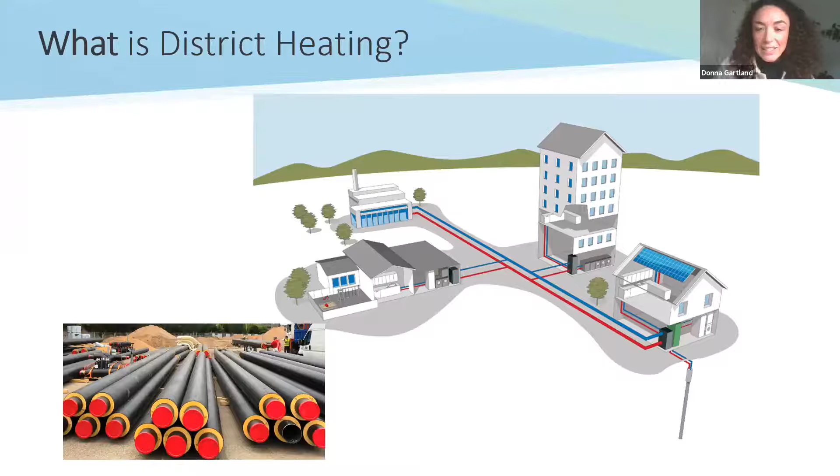This technology is quite new to Ireland, but very well known across Europe. I'm sure Mario, who's also on the call today, will know a bit about district heating — there's a lot of district heating schemes in Italy. But it just hasn't really taken a foothold in the Irish market or the UK market either, so we were kind of the last to the district heating scene.

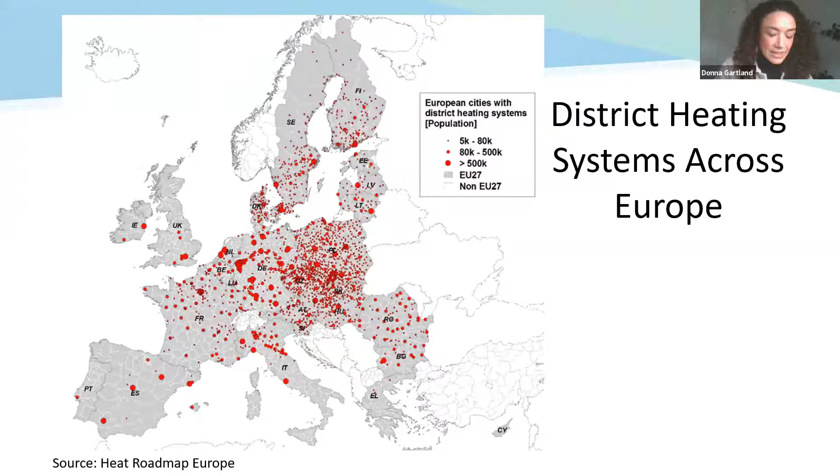It is widely used across Europe, not just in cold countries. There are schemes all the way from the very south of Europe up to the tips of Finland and Sweden. These schemes have been around since the first district heating scheme was developed in Denmark back in 1910 — so it's a well-established and well-proven technology.

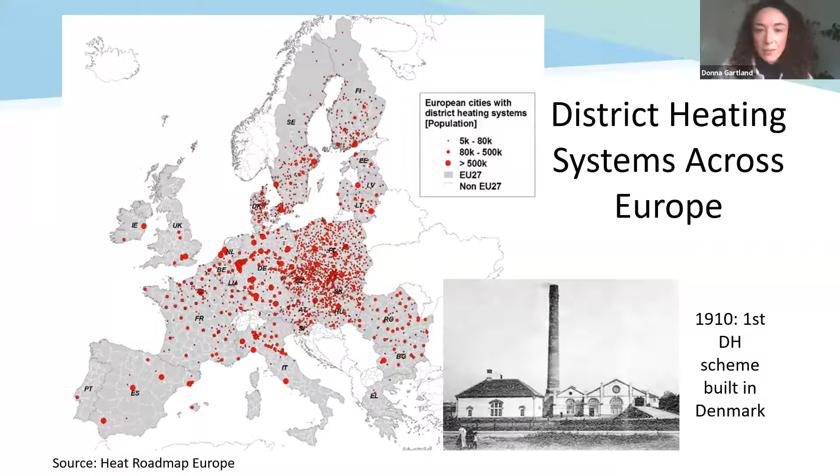So how does it relate to the circular economy? When we talk about district heating systems, we often talk about utilizing waste or excess heat. Taking the direct definition from the EU Renewable Energy Directive, this is heat or cold generated as a byproduct in the industry or tertiary sector, which would otherwise be dissipated unused — thrown away into the air or water — without access to a district heating network.

Obviously building a pipeline down to your local power station just to connect your own household is not going to be economically viable. So you need a network with multiple buildings connected to the pipeline to make use of this, giving you the economies of scale to make use of this waste heat technology.

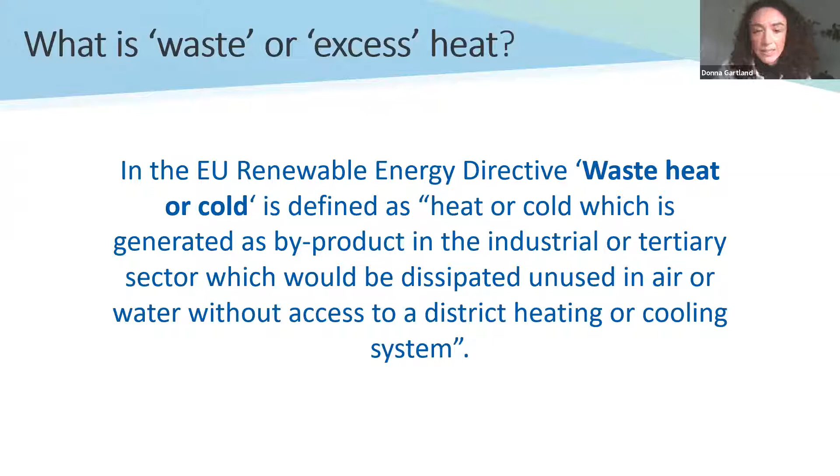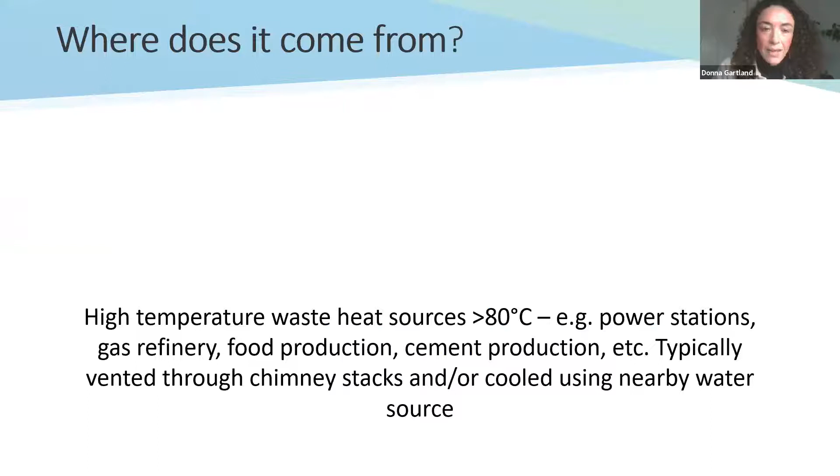So where does this waste heat come from? We have different types of waste heat. There are high temperature waste heat sources, typically above 80 degrees Celsius — directly usable hot water that's currently going to waste from things like cement factories, power plants, waste energy plants, gas refinery plants, and large food production or distilleries.

All of this is quite visible because it's high temperature — on cold days you can see the plumes of steam coming from chimneys, for example. But you also don't see what's cooled through local water sources, as it's also dissipated to local rivers and nearby water sources.

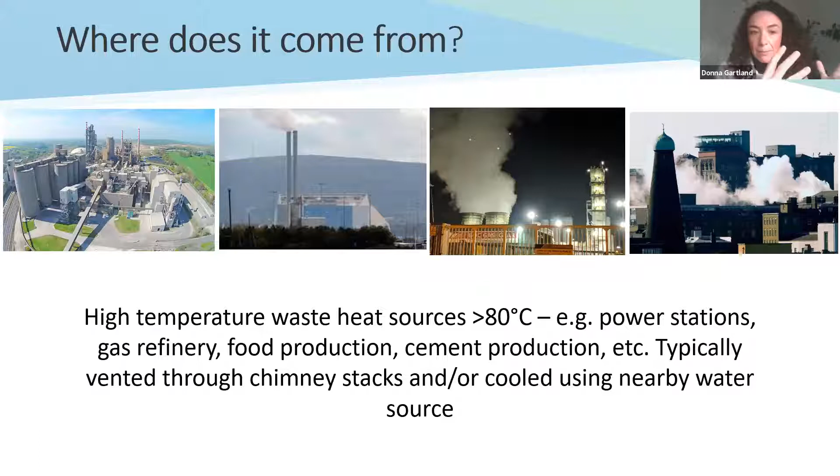We also have low temperature waste heat sources which are also usable, in the range from 20 to 40 degrees. Even though your gas boiler might deliver 70 or 80 degrees to your heating system, the actual space heat you want in your house is usually around maximum 25 degrees. So for new builds and retrofit buildings, this is very directly usable for space heating, but needs to be boosted up for hot water use.

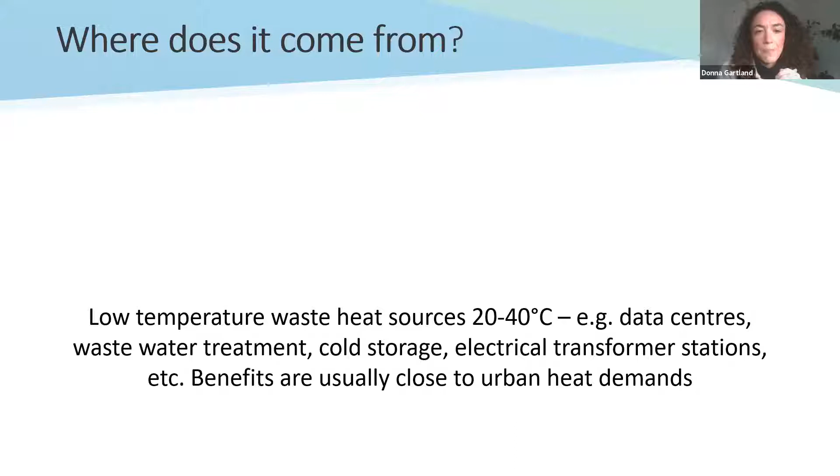The kind of sources for this are things like data centers, which have a large amount of waste heat, wastewater treatment plants, electrical transformer stations, and cold storage. These are just some examples. There's a good European project called Reuse Heat, so if you go into reuseheat.eu, it gives you a larger list of different sources of heat available at different temperatures.

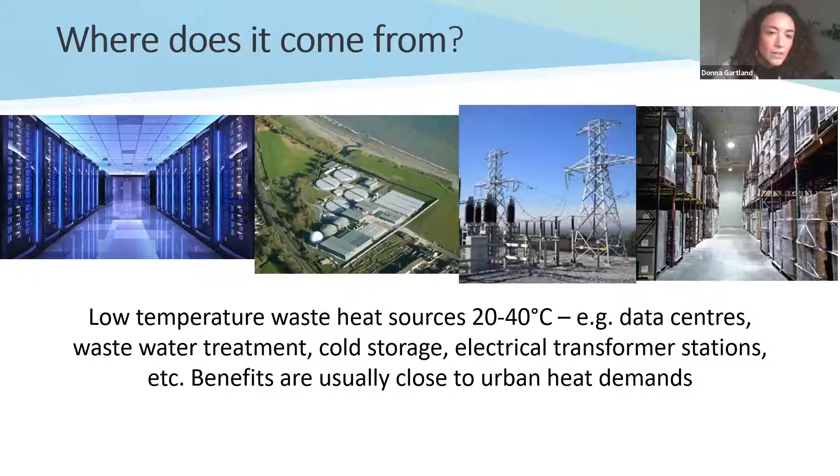One of the advantages of lower temperature sources is they tend to be quite close to urban heat demands. The sources have to be within range, close by to the demands of the buildings you're going to be supplying. In terms of circular economy, this is a big issue at the moment. We're not using this - the only people making use of it are the birds and the fish, especially during a cold spell like we're having now, those guys are enjoying it a lot. But if we can make use of it, we can offset our own fossil fuel use, our gas and oil use for heating.

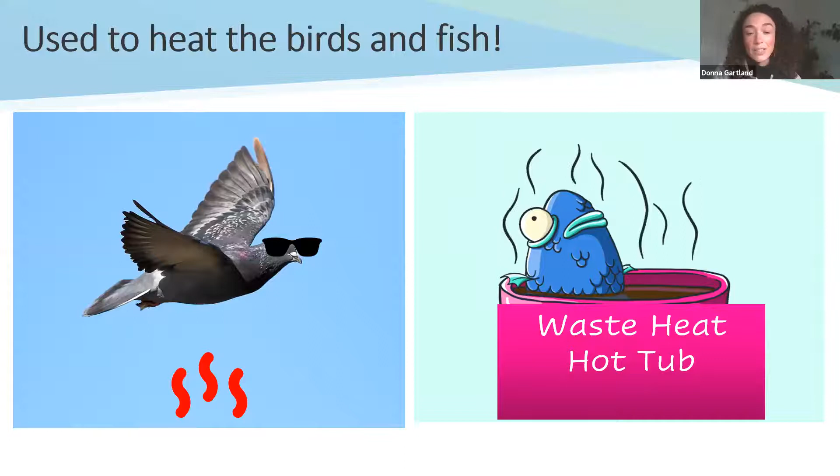If you want to understand where these sources are in Ireland, there are some good resources available. The Irish Heat Atlas, available at districtenergy.ie, shows you the conventional excess heat activities - high temperature, large scale sources such as industrial excess heat, waste energy plants, and power plants. You can see where those sources of high grade waste heat overlap with areas with high density heat demands, which would be highly suitable for district heating rollout. Where those areas overlap are the high suitability areas. Cork, for example, has a couple of large scale sources of waste heat from power plants, and large heat demands within the city region as well.

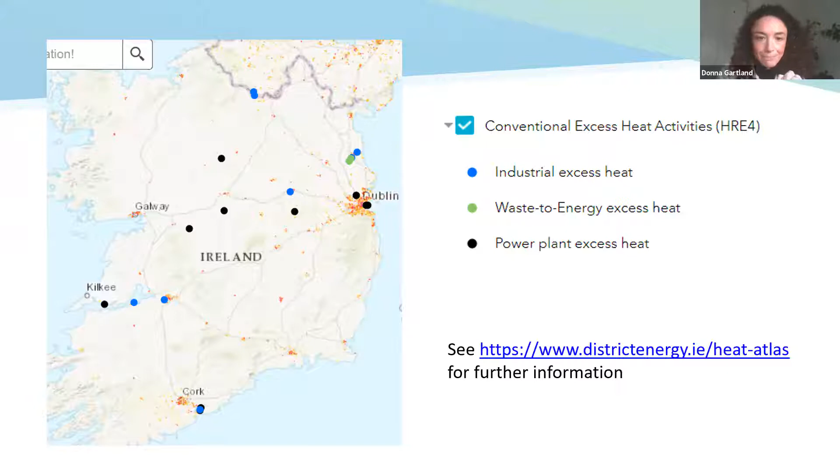Being the Dublin Energy Agency, we've done further work in the Dublin area to look at the wider waste heat sources available - not just large scale power stations, but also the other sources I mentioned, such as data centers and wastewater treatment plants. On that map, the bigger the symbol, the larger the waste heat available from that source. The big red dots are the data centers, which represent a big source of waste heat, particularly around the Dublin area where a lot of them are located. Power stations and wastewater treatment plants also have very large amounts of waste heat available.

We've estimated that there's enough waste heat available in the Dublin region to heat about 1.6 million homes. This is something that's being thrown away. We talk about circular economy, but just because we can't see it, it's not as evident as plastic bottles or anything else that's being thrown away. This is being thrown away to the air and to water, and it's been largely ignored in our energy policy up to now.

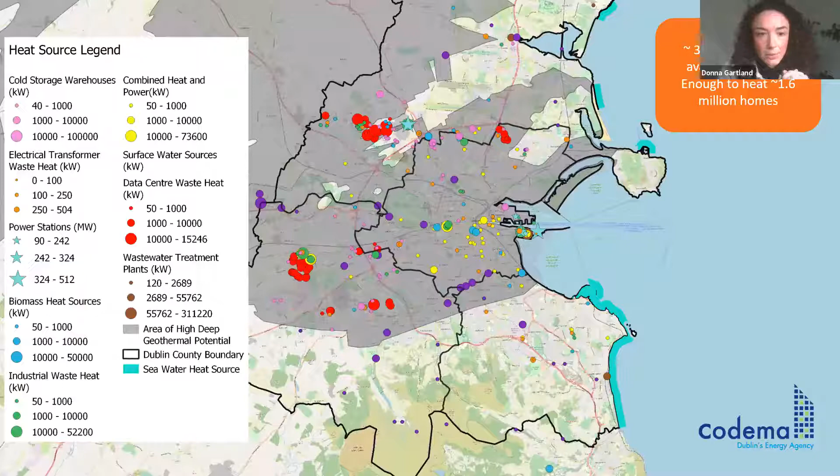Why we're looking at using district heating particularly is because it can be used to recycle this waste heat through the pipelines. Importantly, what district heating offers is thermal storage - basically big giant hot water tanks. Imagine the one in your hot press at home, but multiplied by a few thousand.

So a large hot water tank is the cheapest form of energy storage available. It's a steel tank with a bit of insulation around it. This can then be used to utilize the waste heat at different times. So if you don't have demand at the time when, say, the local cement factory or the local power plant is producing the waste heat, it's stored in these hot water tanks and used during the week or over the next few weeks to supply that demand. So you're able to utilize more of the waste heat that's available.

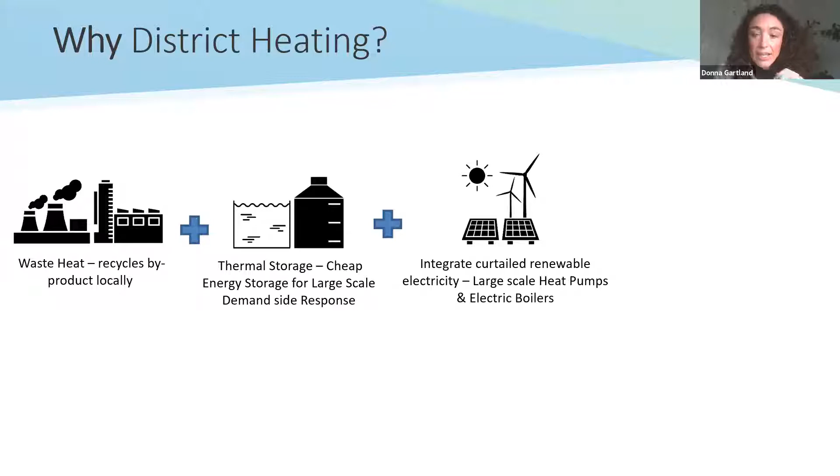Also importantly, thermal storage allows integration of curtailed renewable electricity. Curtailed renewable electricity is when renewable generators, such as large wind or solar generators, are asked to dispatch down, asked to turn off because there's too much renewable energy on the grid. This is essentially another form of waste energy - wind that's blowing, the sun is shining, and we can't utilize that electricity. So again, we can utilize it in the heating sector through large-scale district heating systems, utilizing large-scale heat pumps and electric boilers. And obviously all of this offsets the CO2 and the fossil fuels used in our heating sector.

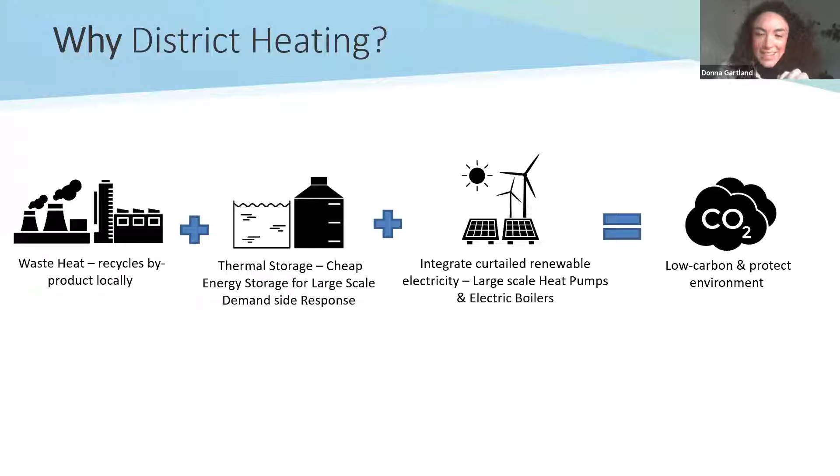So in practice, how are we doing this? As Val mentioned, we're working on 2 schemes. I'm just going to highlight one of them today, which is the Tallaght district heating system. We're also working on another one which utilizes waste heat from the waste energy plant in Poolbeg with Dublin City Council. But the Tallaght scheme is quite innovative in that it's using the kind of lower temperature waste heat source from a local data center.

So a data center was being extended in the Tallaght area, and we saw this as a great opportunity. We've been planning to do something around district heating in Tallaght, and we got European support through an Interreg Northwest Europe programme, and we were able to progress that project with South Dublin County Council driving that project. So you can see here a little image of the nice energy centre that is being built in the next 6 months. And the pipes are just being delivered now, thanks to a few delays from Brexit, but they are now on site.

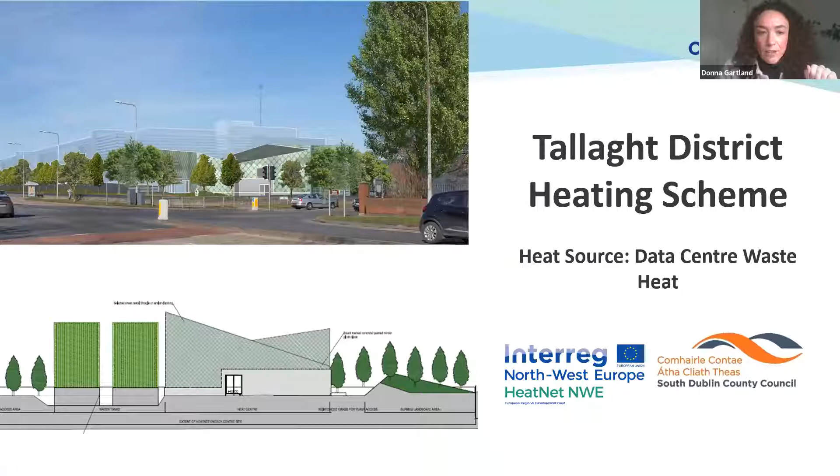So this scheme is currently being rolled out, and the waste heat source, the data center, gives us waste heat input of about 25 degrees Celsius. We're connecting to existing buildings in the first phase, so we have to boost that temperature up to supply those buildings, which have high temperature requirements. We're using 3 two-stage heat pumps, which bring that 25 degrees Celsius up to between 70 and 85 degrees, depending on the time of year. And having that 25 degrees in makes it a much more efficient process than using, say, ambient air temperature in a heat pump.

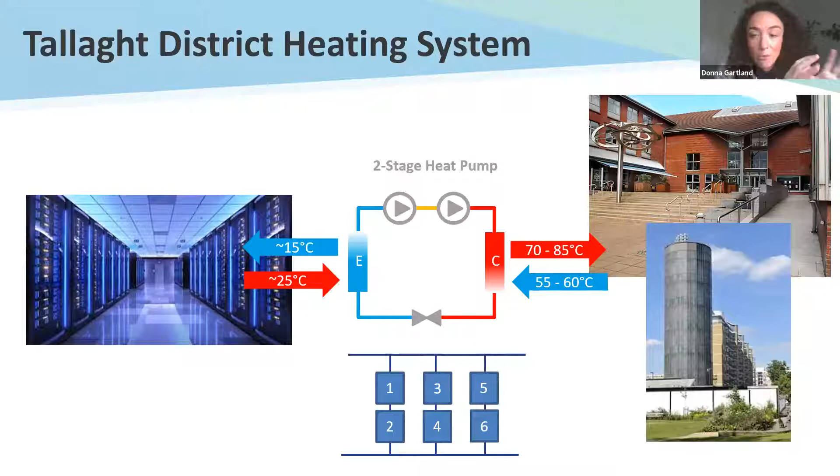So that's a practical example of how we're utilizing waste heat in Ireland, and hopefully this will be the first of many more pipelines and projects to come forward, and hopefully some starting in Cork in the near future. Thank you.

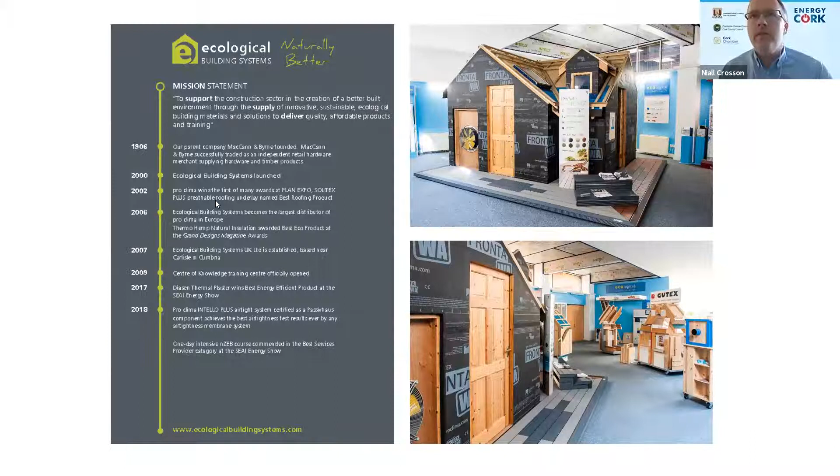We've partnered with companies that manufacture natural insulations from wood fibre, hemp, cellulose, and other innovative air tightness systems. Our core focus is really on health, well-being, and supplying the market with more sustainable materials. But a core part of what we do is training and education, both for specifiers and for builders, in our training centre in the Midlands in Ireland and in the UK.

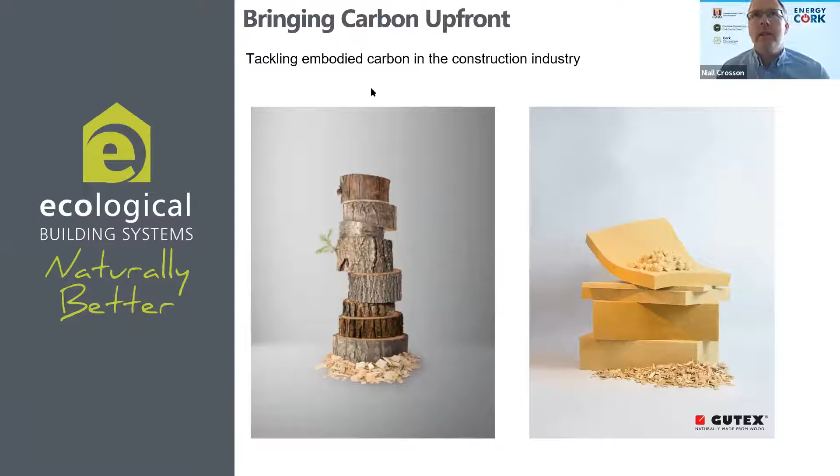So my presentation today will be a whistle-stop presentation. I'll be speaking in relation to the Irish Green Building Council and some of the work we've been doing, and also about the industry as a whole in terms of bringing carbon upfront in the construction industry and trying to tackle embodied carbon.

So if we look at embodied carbon in the construction industry, a guy called Anthony Pak, who I have a lot of respect for and I've read a lot of his papers, calls it the blind spot of the construction industry, and for very good reason.

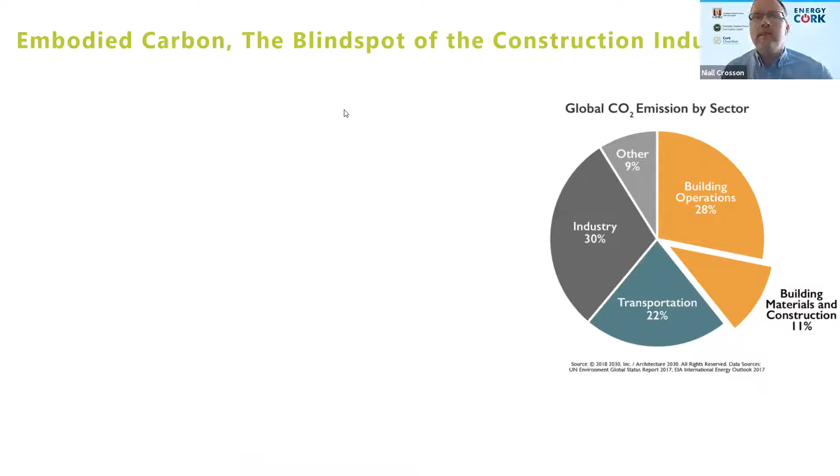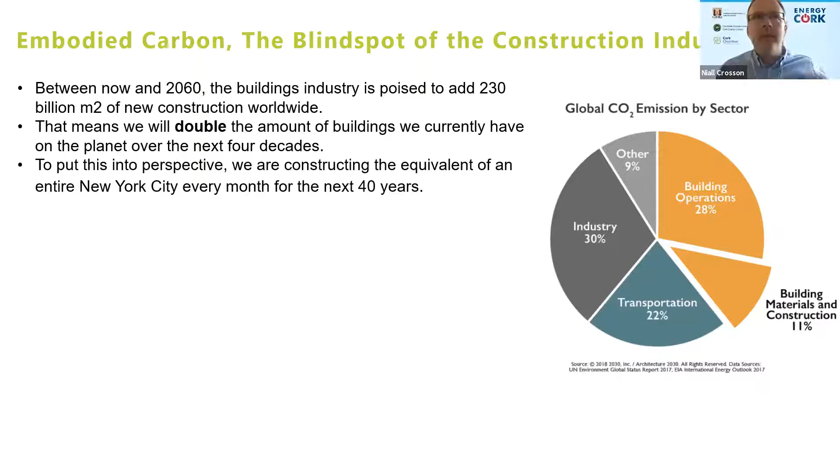According to a paper from Architecture 2030, between now and 2060, the building industry is poised to add 230 billion square meters of new construction worldwide. This means we will double the amount of buildings we currently have on the planet in the next 40 years, a huge increase. To put this in perspective, we're going to be building another New York City every month for the next 40 years.

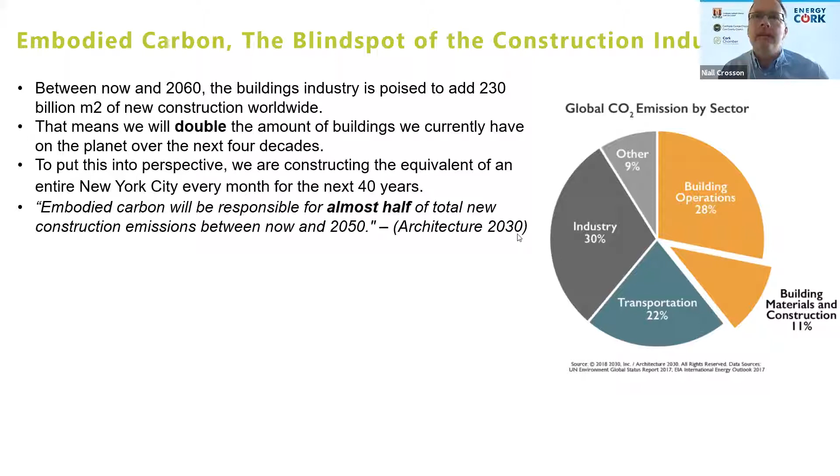Embodied carbon will be responsible for almost half of the total new construction emissions between now and 2050. So if we're missing the embodied carbon, we're missing the point. It's crucial not only to look at operational energy. Operational energy is important, but we also have to look at the materials we use to build within the construction industry to really tackle climate change and reduce our environmental footprint on buildings.

Just to put that visually, this is an illustration from the Wood for Good campaign, which shows an actual building in London called Bridport House. This is a block of apartments built using a construction method called CLT, or cross-laminated timber, instead of concrete. Whereas concrete would emit at least a kilo of carbon for every kilo produced, this CLT absorbs and sequesters a kilo of carbon for every kilo used.

As a result, by using a more sustainable building material, this building sequestered over 1 million kilos of carbon within the building fabric. This is even before it's heated. So this just illustrates the impact our material selection can have on when we build.

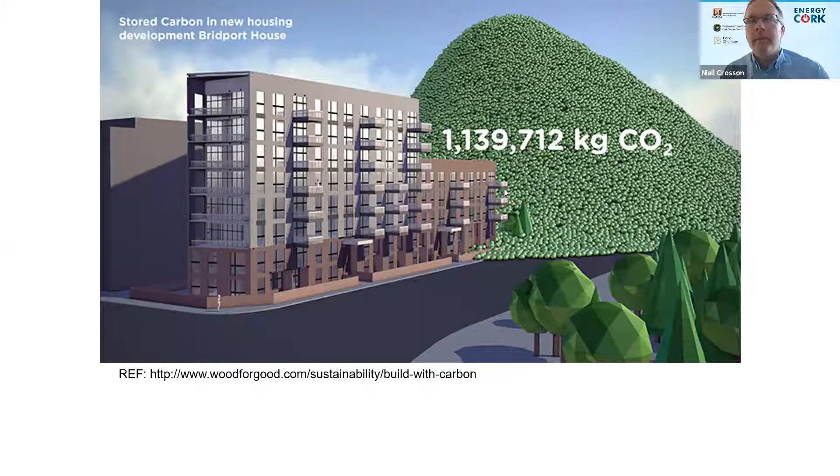In terms of insulation materials, now more than ever, there are many more sustainable alternatives available which have a circular life cycle, such as hemp, for example. This particular product is called thermo hemp. It's grown in Germany and it's manufactured. Basically, the raw plant is separated in a decortication plant where the seed, the bast fiber, and the shives are separated, and go off to various industries in the form of insulation.

The bast fiber is taken, manufactured and used, insulated in homes, and for every cubic meter of hemp manufactured, it sequesters 13 kilos of carbon. So by using this material, you're locking the carbon into the actual fabric rather than emitting carbon. There's a carbon negative footprint, and then it can be recycled at the end of life.

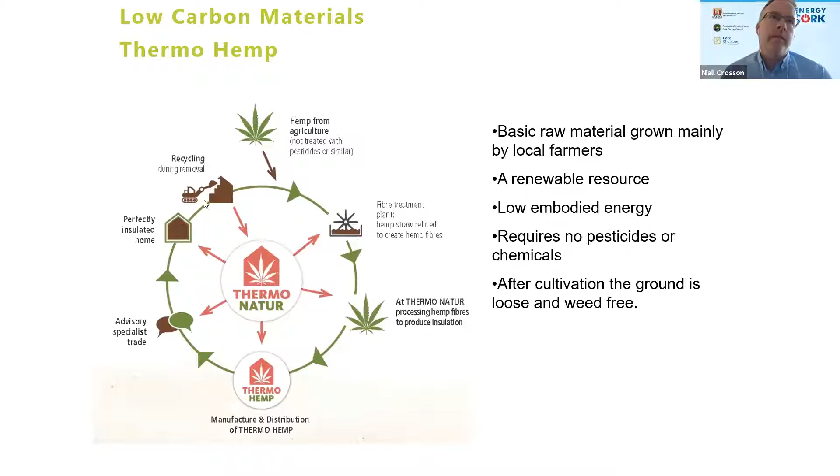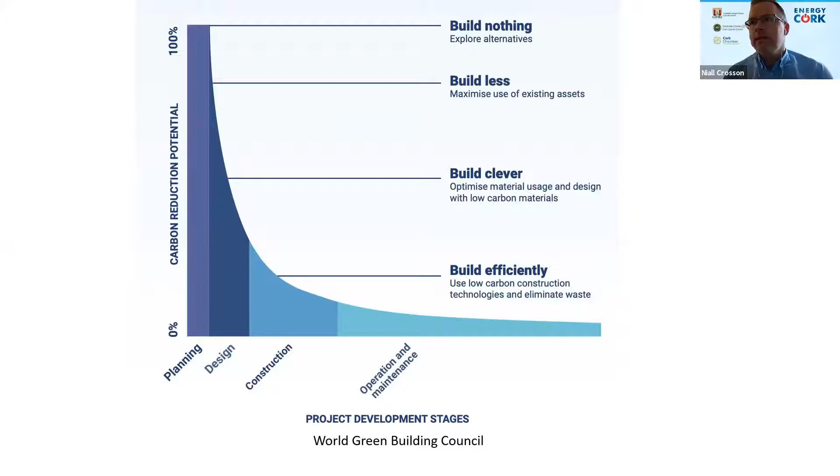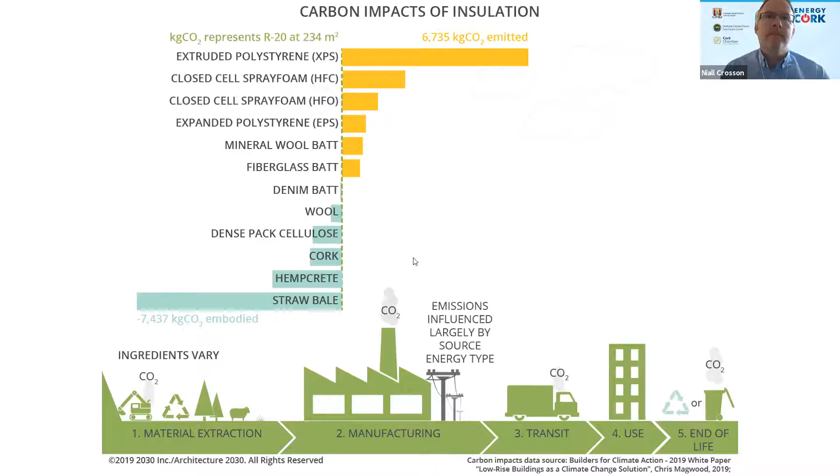This brings me to environmental product declarations. Environmental product declarations are becoming more and more crucial in our material selection, especially for designers and specifiers, and for manufacturers—they are more and more becoming the norm.

For manufacturers, they can gain a competitive advantage by publishing an EPD because it produces documented and certified proof of the environmental impact of their product. So it tries to take out the greenwash and allows specifiers to analyze materials and compare like for like. It also assists companies to adhere to their company mission and provide more sustainable alternatives.

Specifiers can also earn points by utilizing EPDs in buildings using rating systems such as BREEAM, LEED, or the Home Performance Index in Ireland. Implementing an EPD in the marketing strategy also helps communicate a product's environmental benefits, and the EPD can help improve supply chain development within manufacturing processes. For manufacturers that get an EPD, it supports the ISO 14001 standard and allows the company to improve their manufacturing process. It's also very effective for benchmarking and increasing visibility.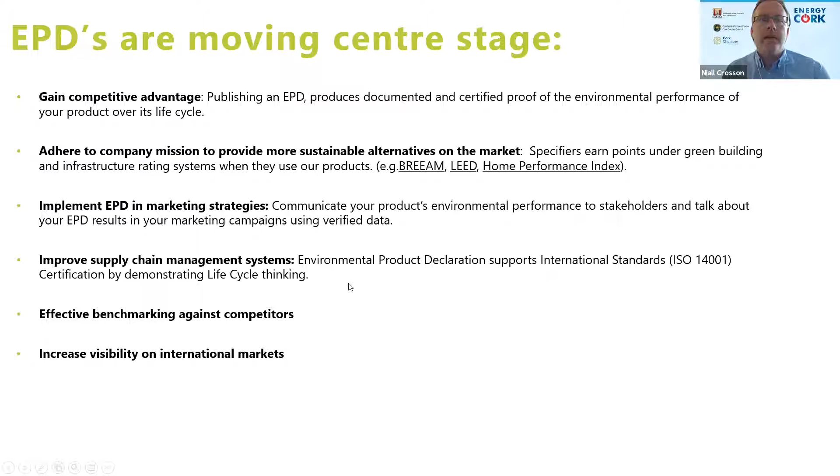On this website, epdireland.org, it's a central database developed by the Irish Green Building Council where you can log on and download EPDs from a whole array of many, many manufacturers. So there's a central portal that specifiers can now review and then make selective and informed decisions about what materials they use in buildings and specification.

In the built environment in Ireland, it influences over 50% of Ireland's carbon emissions. So really looking at the raw materials we're using in buildings is the next step to really realizing low carbon buildings.

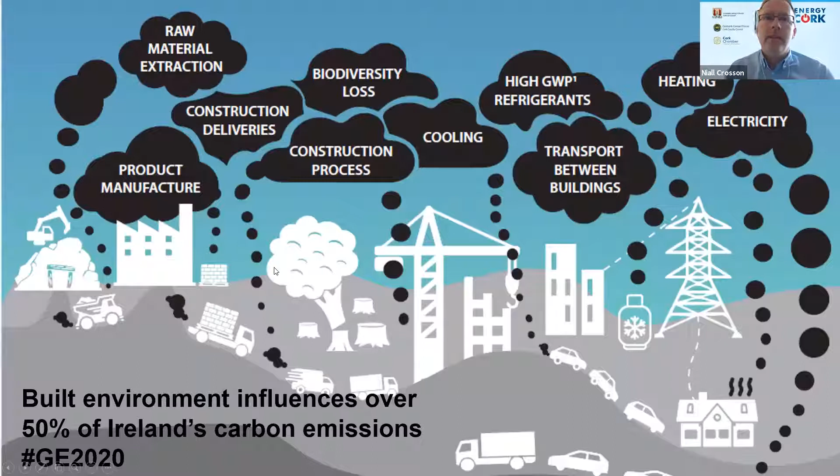This is the report from the World Green Building Council—I'd highly recommend 'Bringing Embodied Carbon Upfront.' I just took some main points from it in terms of their definition. Net zero carbon embodied carbon should be pursued as part of a whole life cycle approach to carbon reduction that includes net zero operational carbon. So a net zero embodied carbon building, new or renovated, or infrastructure asset, is highly resource efficient with upfront emissions minimized to the greatest extent possible. And I think that's absolutely key, and it's something we need to realize more and more as we renovate and as we build going forward.

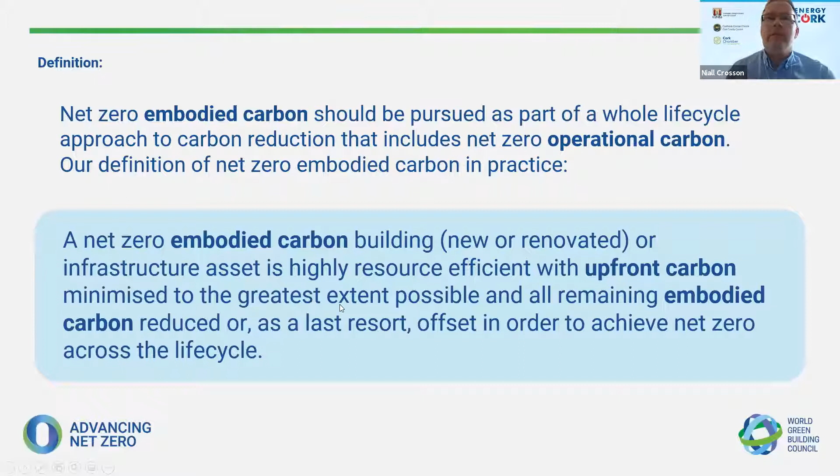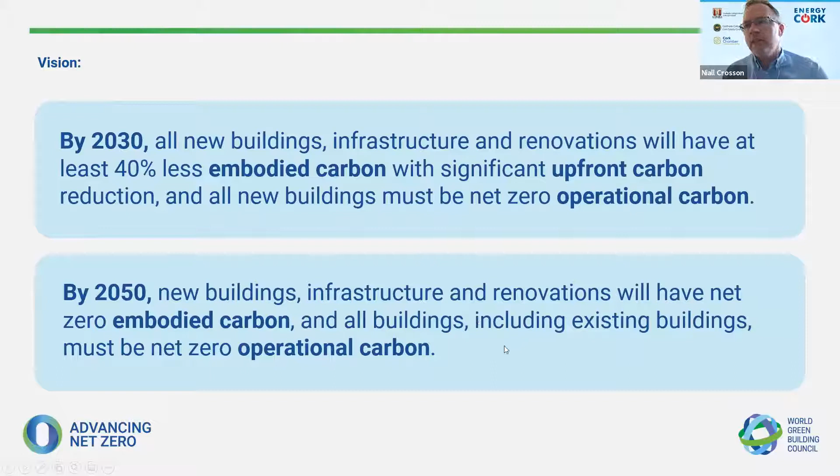And by 2030, all new buildings in terms of their vision and infrastructure and renovations will have to be at least 40% less embodied carbon with significant upfront reduction. By 2050, new buildings, infrastructure and renovations will have net zero embodied carbon. This shows it's very ambitious, and with the new government announcement this week, this should form a central part if we are going to seriously impact our carbon emissions in buildings and the built environment.

Just to give a figure relative to Ireland in terms of embodied carbon in buildings and some rating tools - this is documented information I received from the Irish Green Building Council using one-click life cycle assessment software. It analysed carbon emissions from 12 apartment developments in the UK and Ireland, and embodied carbon ranged from 355 to 2,600 kilos carbon per square metre per home, an average of over 900 kilos per square metre.

To put that into figures, this embodied carbon is equivalent to 114 years of operating energy based on the current A2 standard. So it's an awful long time to pay back that embodied carbon. You could have a low energy building but high upfront carbon emissions.

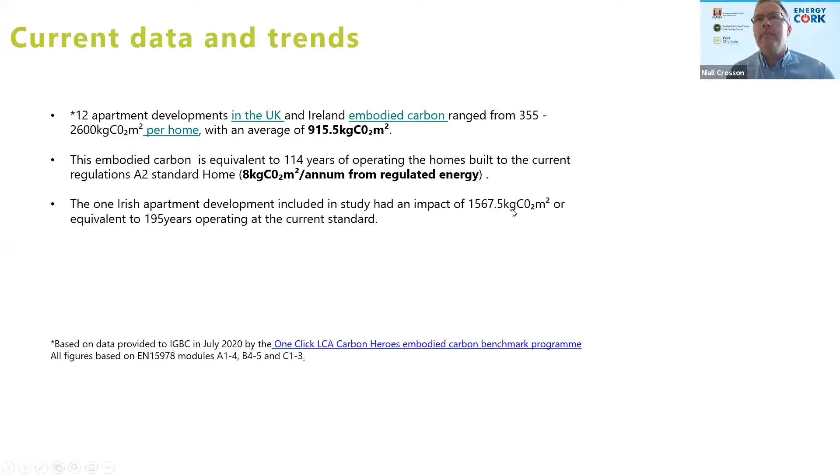One Irish apartment actually had an impact of over 1,500 kilos carbon per square metre, which takes almost 200 years equivalent in operational energy. The figures provided for Nordic countries averaged much lower, down to 365 kilos CO2. But this shows the huge potential for improvement to tackle the carbon blind spot we have in the construction industry - in Ireland we have significant upfront carbon emissions in buildings.

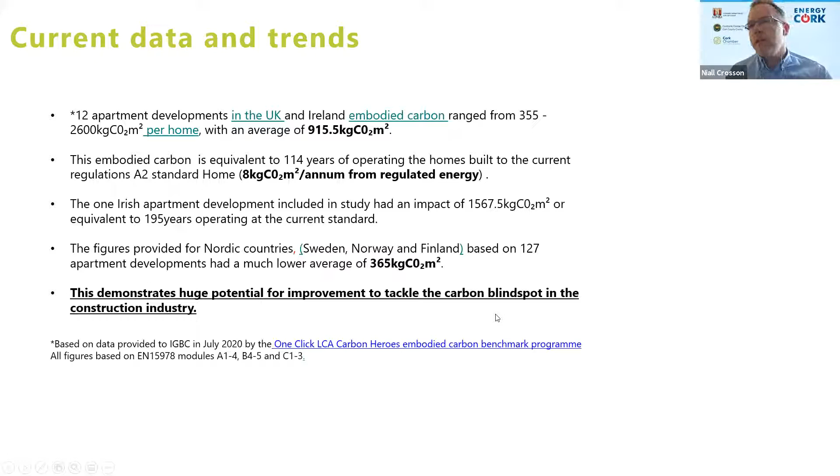In Ireland we have new benchmarks, such as the Home Performance Index, a very useful tool from the Irish Green Building Council - more information can be found on the website. This discourages oversized homes, sets out zero carbon definitions aligned with the International Living Futures Institute, encourages the use of EPDs and construction waste targets, and also starts integration levels reporting methods. It's a very robust rating tool.

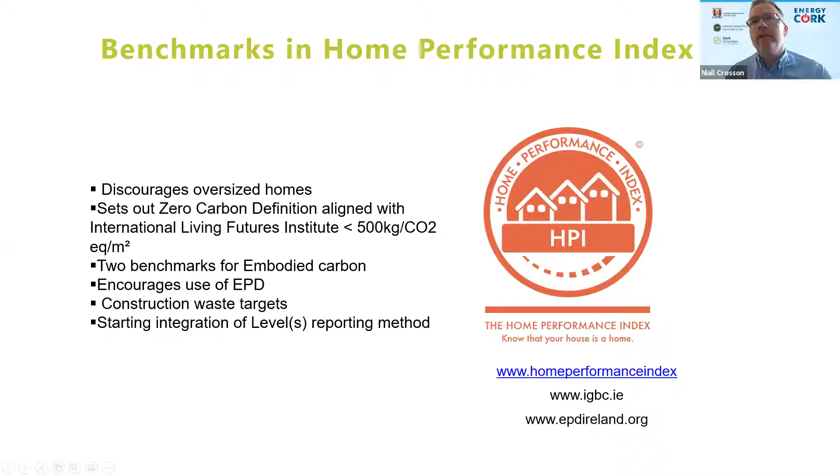In fact, in Cork, one of Ireland's first Home Performance Index Gold buildings was built by architect Wayne Moorhead with John Moorhead Architects. It used natural insulation in Douglas, Cork, and also has Gutex wood fibre insulation within it - a good example of a good case.

To summarize - EPDs provide fully transparent information to reduce greenwashing, and are a source for materials, ingredients and their life cycle. They will lead to greater transparency, so EPDs going forward are a key decision-making tool for specifiers.

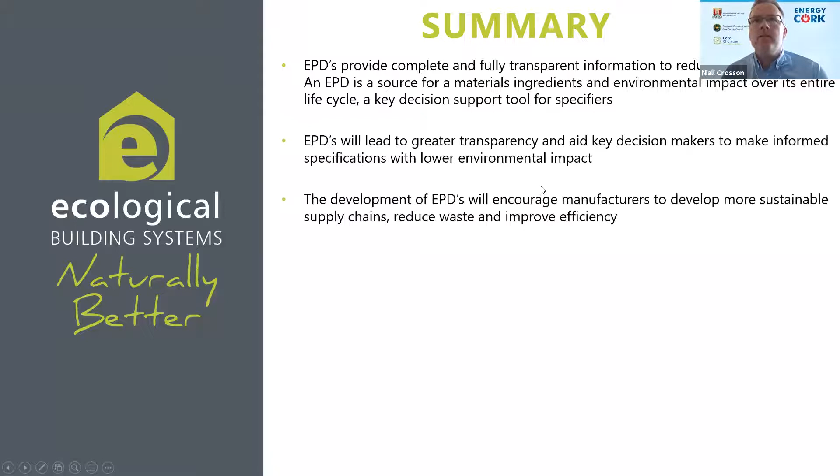The development of EPDs will encourage manufacturers and put pressure on them to reduce waste in their supply chains and improve efficiency. Material choices do have significant impact on upfront carbon emissions in buildings, and insulation choices greatly affect the carbon footprint of a building in terms of embodied carbon and operational emissions.

So insulation can either be a significant contributor to the embodied carbon footprint of a building or a carbon sink, depending on the choice. Materials such as wood, straw, clay, hemp, cork and so on naturally sequester carbon, so using these materials can help reduce upfront carbon emissions.

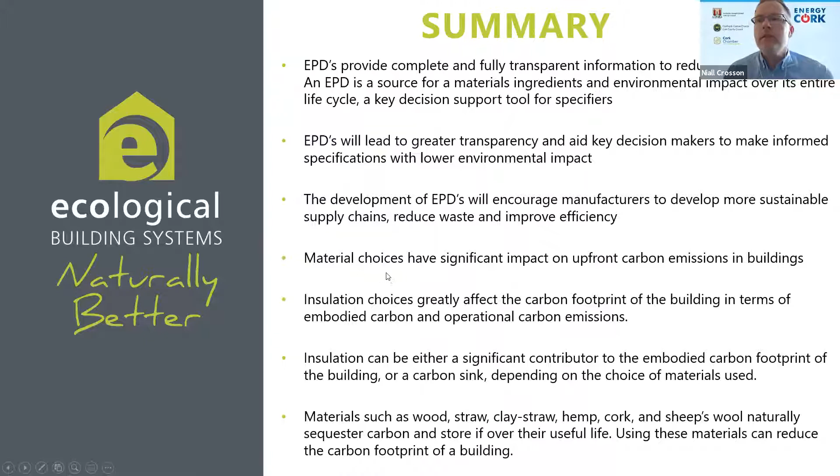Finally, this is a quote from Tuesday this week at the Building Life meeting with the Irish Green Building Council. Mary C. Donnelly, director of E3G, said: 'We don't have the luxury to wait until 2030 measuring embodied carbon. Measuring embodied carbon is urgent.'

And thankfully, now we see architects declare, engineers declare, and also chartered surveyors declare a biodiversity and climate emergency. This is rewarding to see and encouraging for the future. Thank you for your time, and that's me done.

Thank you so much, Niall. That was really comprehensive and absolutely on the ball in terms of the topic. We've learned an awful lot and looking forward to it. I know there's questions coming in - I'm keeping an eye on the chat and looking forward to picking up on some of the issues you've raised, in particular trying to get an understanding as to the status of where we are in Ireland and how we might be able to ramp up with some of these initiatives going forward.

So look, we've heard from Donna in relation to the need for district heating to keep our homes warm, and from Niall in relation to the opportunity to be smarter about how we insulate our homes, all of which we need on a cold, wet day like today. We're going to shift gear now and go somewhere hot and sunny - we'll be joined by Mario Pagliaro, who's in beautiful Sicily. The next presentation is from Mario, who is in the Research Council in Italy.

Thanks a million. Thank you. Can you hear me? Perfectly, yeah. Thank you for the invitation. I will go quickly. The topic of my talk today is the circular economy of a new storage technology, which is called the lithium-ion battery. Yes, I'm a chemist and working in Sicily.

Outlook for my talk today: I will briefly present fresh information on this new technology for electricity storage, and some insight on the information crisis concerning new energy technologies.

Two years ago, we wrote an article in which we cited fresh data concerning recycling and reuse of lithium-ion batteries. The real percentage was 58%, so more than half of the whole output of end-of-life batteries. But reputed scientific journals and also the general press were writing that the rate of recycling was less than 5% in Europe, and something like that in the rest of the world.

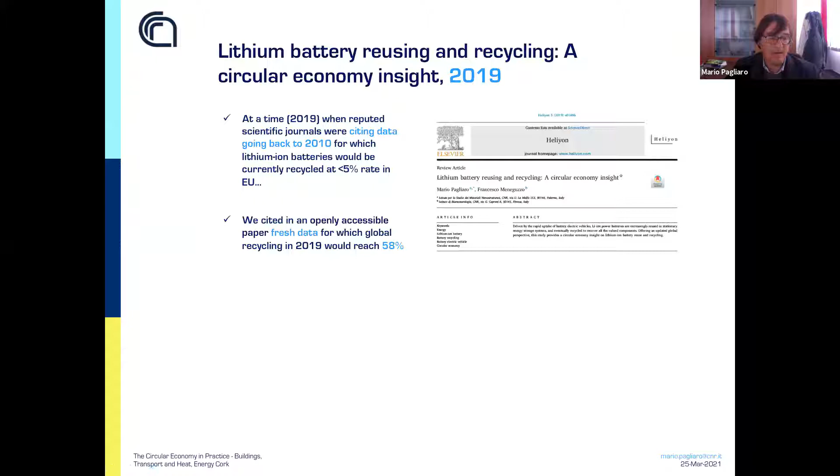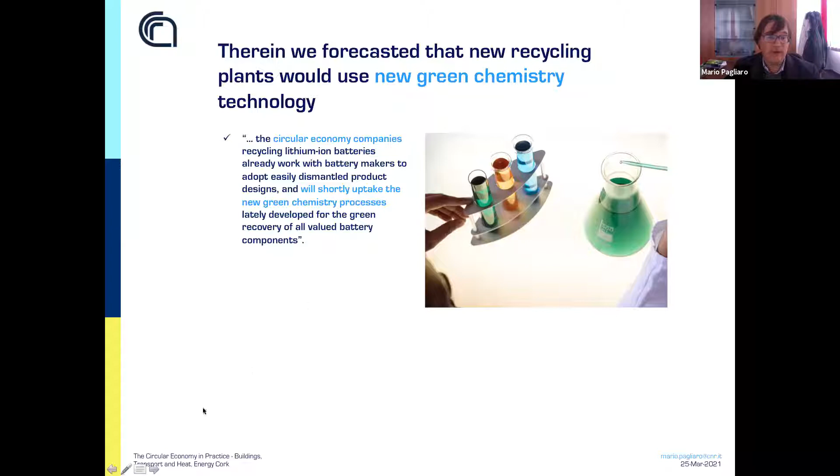So in that paper, we wrote that the circular economy companies recycling lithium batteries would shortly uptake new green chemistry processes, therefore using new green chemistry technologies.

So have a look at the technology. It's very simple. You first collect the batteries, and you have to produce this black mass from which all the relevant metals are isolated. In order to do that, you first undertake shredding of the batteries, separate with magnetic separators the metals, copper and aluminum, and then you get this black mass and can process it directly. Copper and aluminum, of course, have economic value and are completely recycled. This is a proprietary in-house technology developed in Singapore.

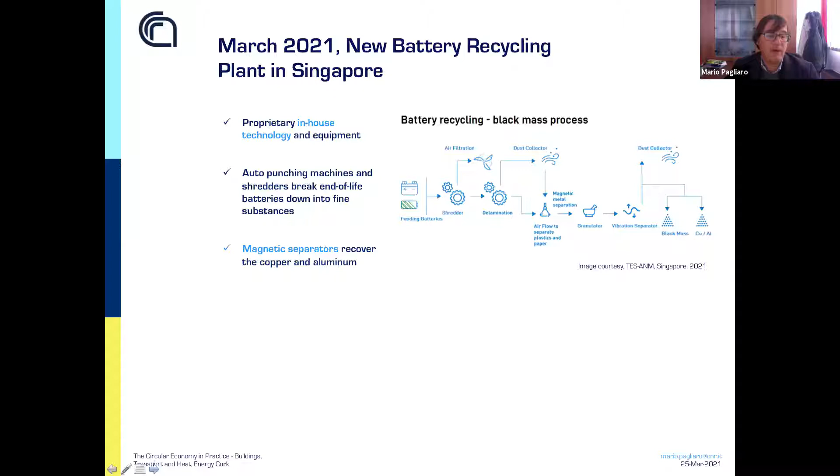There are many others. Have a look at the chemical treatment, the new green chemical process. It works in water, so you need water and some other chemical reactants, like hydrogen peroxide, but not toxic chemical reactants—these are the leaching chemicals. And you isolate graphite, which composes the anode of your battery, and eventually battery grade cobalt hydroxide and lithium carbonate. Everything is recycled, and the process is really environmentally friendly because there are no secondary contaminants. There are no noxious emissions into the atmosphere, or volatile organic compounds. It's very clean, a completely circular process, a new green chemistry process in action.

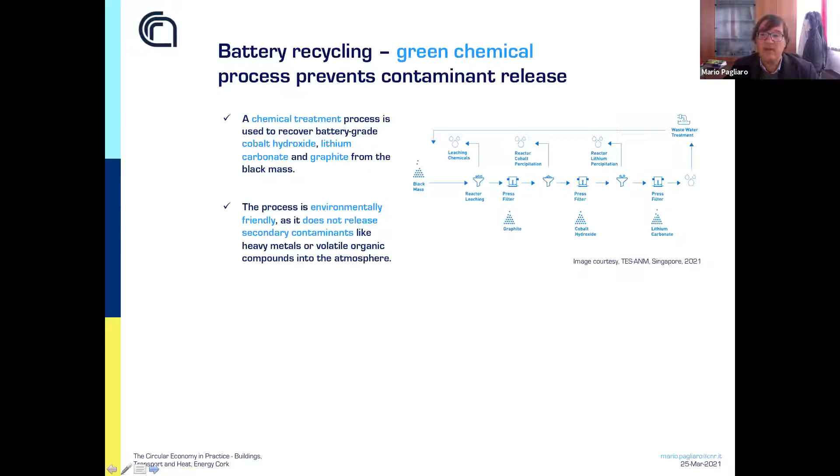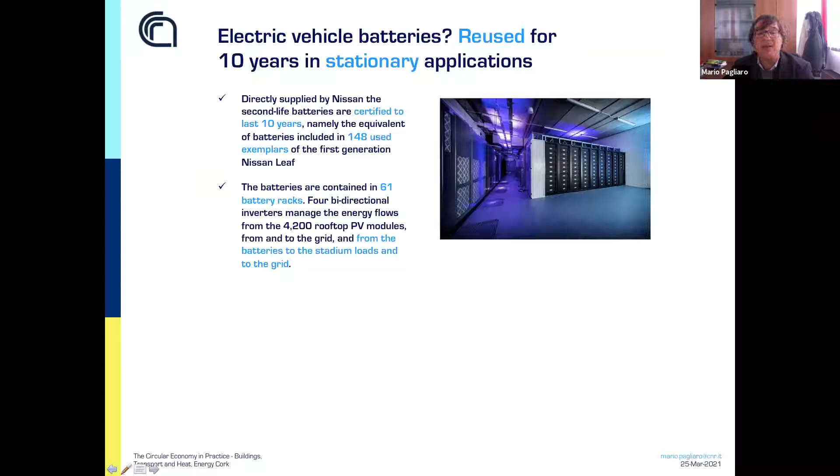Electricity is collected from the rooftop. During the day, usually the stadium is not used, so all the electricity generated by the photovoltaic modules on the roof feeds the batteries. When the batteries are full, you use all this energy at night when there are events, and the absorption of power goes from 200 kilowatts to more than 3,000 kilowatts in a matter of less than half an hour. Very simple technology, very efficient. It has worked very well for more than 2 years.

So first question: are there enough lithium-ion batteries available now for profitable reuse and recycling? The answer is yes.

This data is from the leading expert in Europe, Hans-Erik Melin, who works in London, but he's Danish.

For reuse, we already have something like 150,000 tons every year. We are here now, and available for recycling we have slightly more, but if you look at the slope of these two curves, we'll have a lot of batteries available for reuse, all coming from electric vehicles. The slope is less pronounced for recycling because those batteries include ones from portable electronics, mobile phones, laptop computers, home robots, and so on.

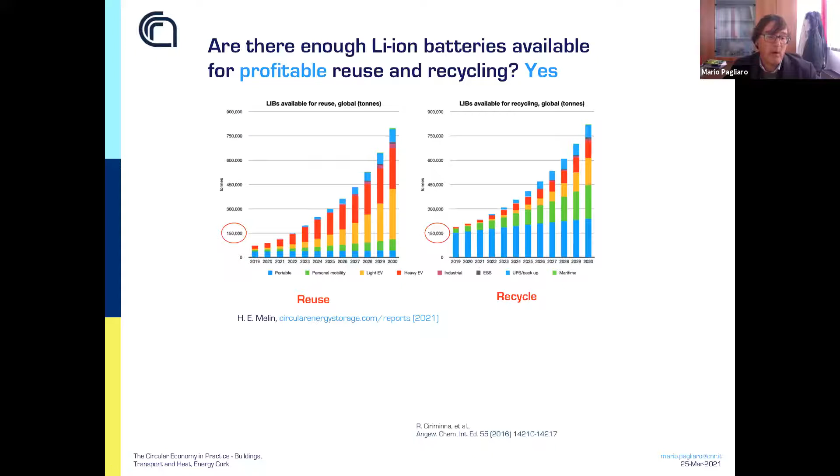So does the world have enough capacity to recycle the current output of end-of-life batteries? The current capacity of all plants in China, Europe, North America, and Southeast Asia exceeds 700,000 tons per year. This is enough capacity to recycle the volumes that will be available in 6 years, in 2027, including production waste. So actually, the global capacity is already much larger than the output of end-of-life batteries.

What is this recycling capacity installed? The geographical distribution mirrors exactly the pattern of production: almost 31,000 tons per year recycling capacity in the European Union countries, almost 30,000 tons per year in the United States of America, and an incredible 707,000 tons per year in China alone.

Consider this company called Umicore, a chemical company that sells catalysts, metals, and so on. It is leading Europe's battery recycling. I think they're based in Belgium and have several plants in Europe. Their capacity is 7,000 tons, while the largest company in China has a capacity of 120,000 tons.

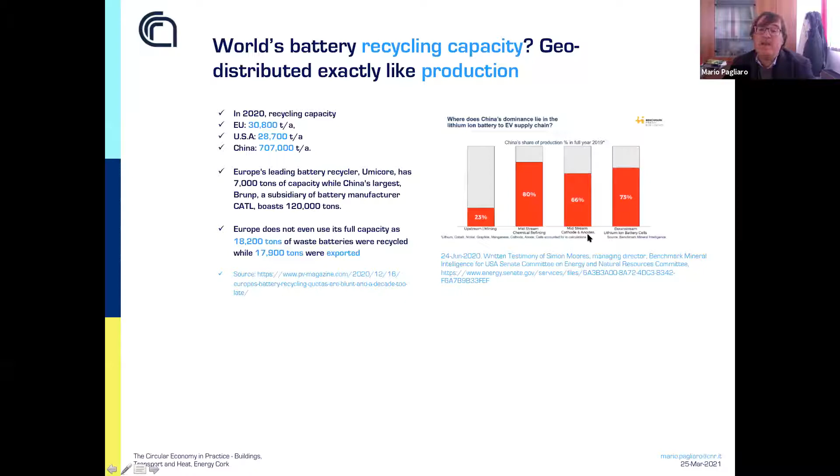If you look at the reasons why China dominates the battery market, have a look at the written testimony of Simon Moores, managing director of a consultancy in London—his third written testimony to the United States Senate last summer. He shows that China dominates because they invested in midstream chemical refining and midstream cathode and anode production, something we in Europe and North America didn't do.

So should we invest right now in battery recycling or reuse? Yes, it is profitable and convenient, but only if you have a deal with a company ensuring a prolonged supply of end-of-life batteries. Why? Because battery manufacturing companies are very much aware of the economic value contained in spent batteries.

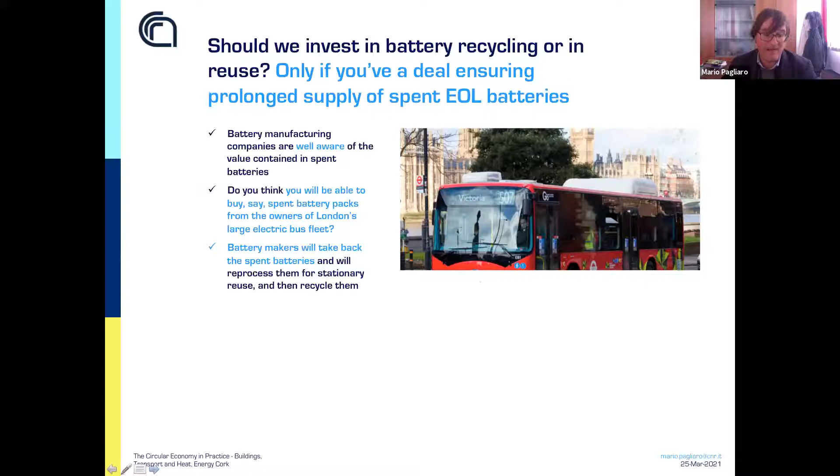This is London, for example. The whole line 507 is completely electrified. This is an electric bus, and the batteries are here—beautiful lithium ferrophosphate batteries. But if you think you'll be able to buy the batteries in London, forget about it, because battery makers will take back the spent batteries directly from the owners, the electric bus companies, and recycle them at their own plants.

So what is the best lithium-ion battery chemistry? It's a technology very simple in chemistry, called lithium ferro—ferrum is Latin for iron—phosphate. It contains no toxic and rare cobalt. Three years ago we wrote an article forecasting that LFP batteries will remain the dominant technology for years to come, because they are safe, long-lasting, and now also have large capacity and are lightweight. Those are exactly the batteries providing electricity to the electric bus in London.

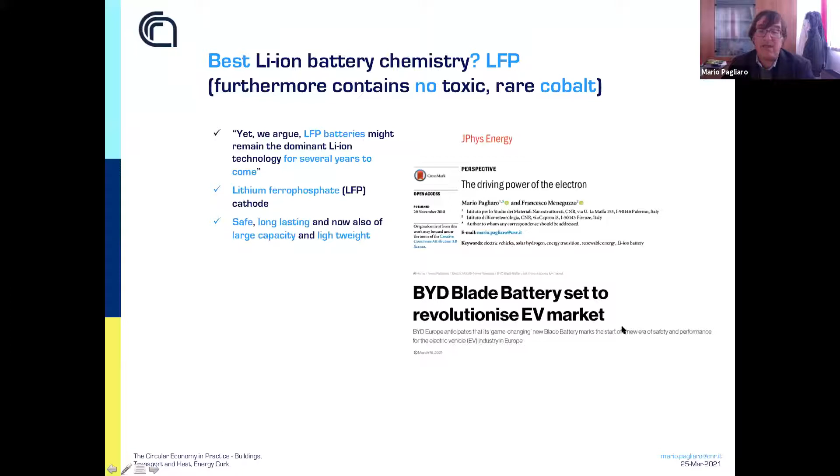And now BYD, a large battery company, developed a battery called the Blade battery. It uses only LFP, works very well, and is set to revolutionize the electric vehicle market.

Is there a true information crisis when we talk about lithium-ion batteries in the general press or even in scientific journals? These are very recent titles from different sources: 'The rise of electric cars will leave us with a big battery waste problem,' 'Failure to recycle old phones leading to shortage of vital battery materials,' and so on.

More or less, the press agrees that there is a crisis with recycling and reuse. Actually, there is absolutely no crisis. Lithium-ion batteries are already reused and recycled across the world at a rate exceeding 90%. Less than 10% of batteries—mostly small batteries from mobile phones—end up in landfills. And even that percentage is rapidly decreasing, because it's so convenient to recycle and reuse batteries that people will pay for the spent batteries.

So there's no way that the batteries will landfill in Africa or in Sicily or in less economically developed countries. New green chemistry technology will shortly replace first generation pyrometallurgical recycling. There will be no burning, no fire, only green chemistry technology. And very often, information in the mass media, but also at times in scientific journals on new energy technologies, which include batteries but also, for example, solar cells, is wrong, or very simply, is very much outdated.

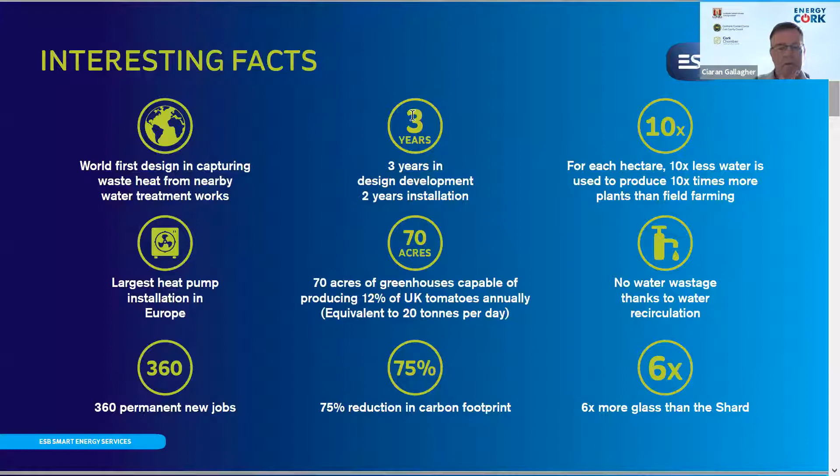The scale of the project, I'll show some photographs later on, it's vast really. There's 6 times more glass on these greenhouses than there is in the Shard building in London, if anybody is familiar with that building.

Most people are familiar with what heat pumps are. It's just a conventional refrigeration process. If you reach around the back of your own fridge or freezer, you'll find the heat being rejected there. All we're doing is using the reverse of that, using that heat and delivering it to the glasshouses.

It's what we call a hybrid system. The heat pumps are actually powered by a CHP, a combined heat and power plant. So although it is grid connected, it doesn't need to be, the grid connection is for pure backup. An interesting aside is that the CO2 from the exhaust of the combined heat and power plants is also delivered to the greenhouses for photosynthesis reasons. So it's quite a clever application.

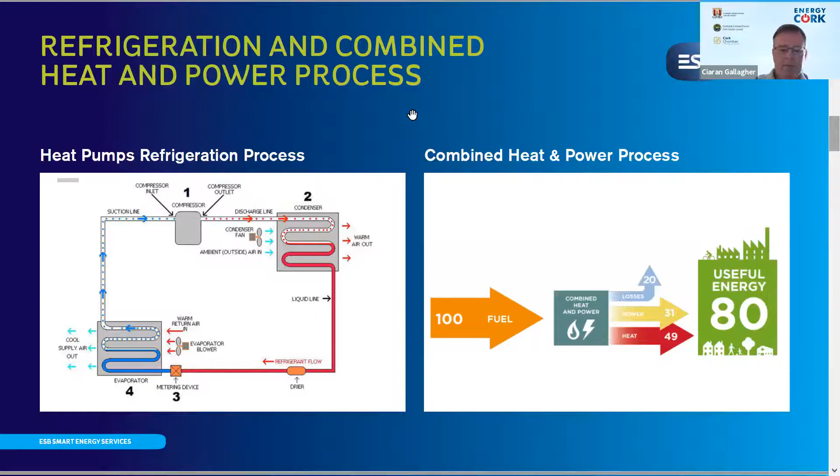We also have a backup. The client insisted on having backup boilers in case there's any issue, because there's roughly £2 million worth of crops in these glasshouses at any one time, so the loss of heat would be catastrophic. So there are backup boilers.

Just in terms of scale, across the 2 sites there are 29 heat pumps at 2.1 megawatts thermal each, so there's over 60 megawatts thermal going into these plants. We have 5 CHP units delivering 6 megawatts to power them, and the gas boilers, which are backup, produce 27 megawatts of heat as well. So it's quite a high scale for this type of project.

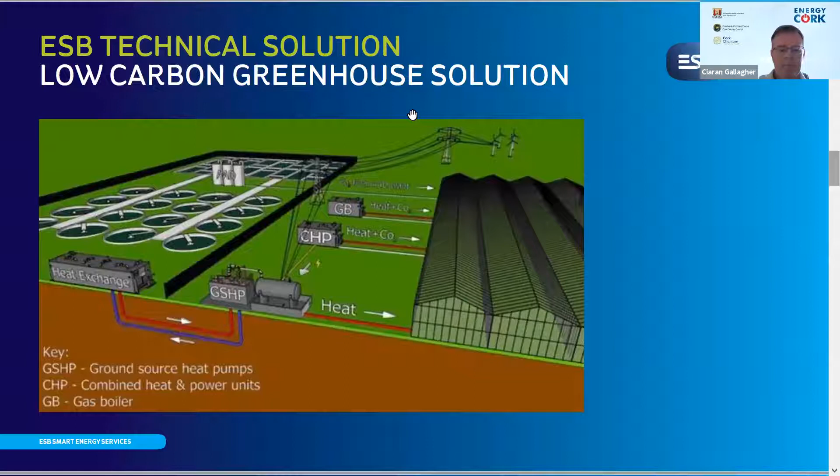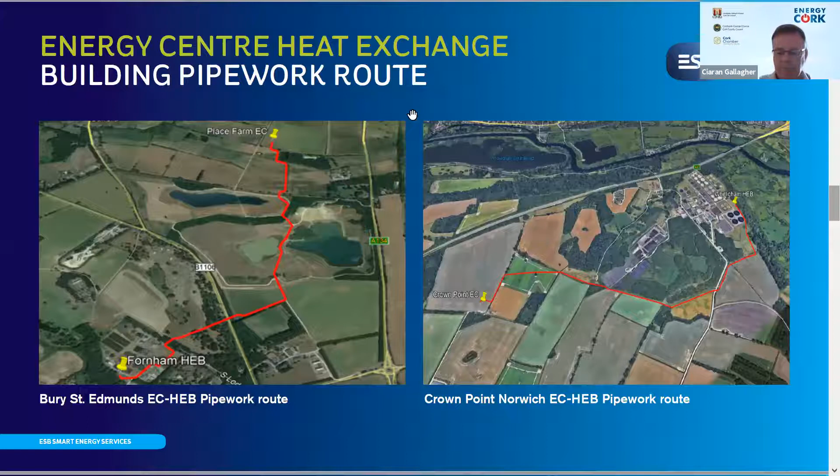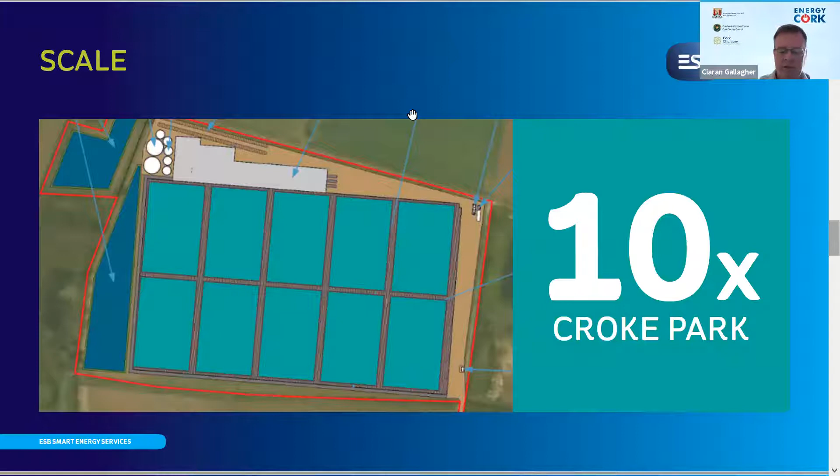In terms of scale, this is just a representation we use. It's under glass - you've 10 times the area of Croke Park, which is hard to imagine unless you actually see it.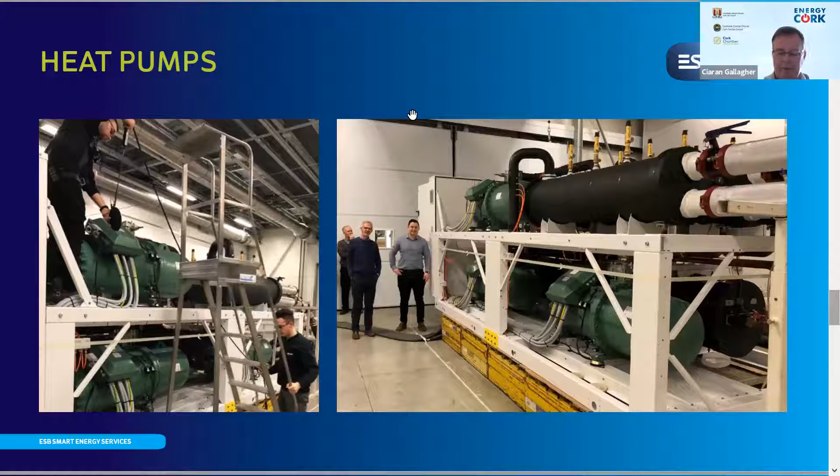I'll just show some photos now of what went on. These are the actual heat pumps, the 2 megawatt heat pumps, during a factory acceptance test. The heat pump manufacturer is a company called Aermec, based in Verona in Italy. This all kicked off at the start of the pandemic, so as Italy was going into lockdown, our heat pumps were just coming out of factory acceptance tests. We were very concerned, as we had to meet an RHI deadline for this project. So we had to send over trucks, more or less collect them under emergency situations, and get them to the UK just as Italy was going into a phased lockdown. It was quite a fraught time in the project.

We got there, and these are the heat pumps being delivered to one of the energy centres - I believe that's the one in Norwich. On the bottom left you can see the configuration as they're laid out in the energy centre.

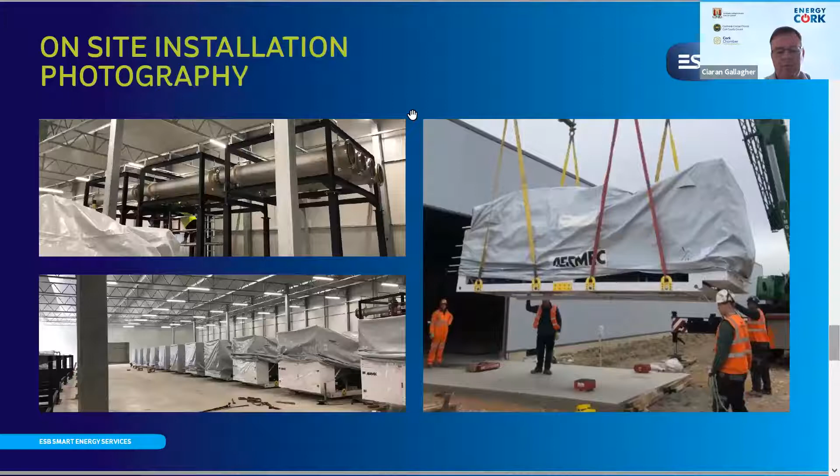Farming, or certainly this type of farming, is not something I'm well up on, so we were quite happy to provide the heat. The model is that the LCF, Low Carbon Farming, who are the contractor, rent out space in the greenhouses to various growing companies, and they plant and manage their own crops. Our role is purely providing the energy centres and the heat.

So that's the end of my presentation. Hopefully I've got you back on time now. I think I've saved a bit there. So thank you, and if there are any questions, very happy to take them.

Brilliant, Ciaran, that was phenomenal in terms of scale. Mario left us with a beautiful image, and you've left us with a totally different mental image, quite extraordinary in terms of the project you've presented on. As I said at the start, this was going to be a very rich session because of its diversity. But within that diversity, there's a really strong thread of innovation within the context of energy and the circular economy. I've been keeping an eye on the questions as they've been coming in. I suppose what we'll do is go to each of the panelists one by one initially, while encouraging other panelists to contribute if they'd like to on any question. Then I'll try to join up questions so we can discuss a few general issues a bit more. I've tried to group the questions as I've seen them coming in.